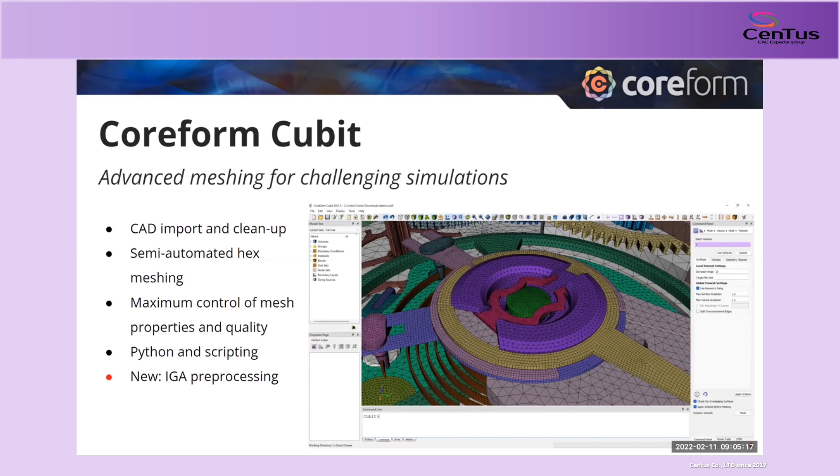I guess first, the learning objectives. If you go ahead, Greg. We're talking about 4 things today. First of all, the big picture, like what shapes can be hex meshed. We'll go through some slides to explain that. Then when Greg goes into the live demo, talk through the gotchas, some common issues that make hex meshing challenging. Greg will reference all of the powerful Cubit hex meshing features, and then walk through the item wizard, which puts them all together in a nice, straightforward workflow. ITEM, we'll define once and for all today, means immersive topology environment for meshing. Let's call it the item wizard.

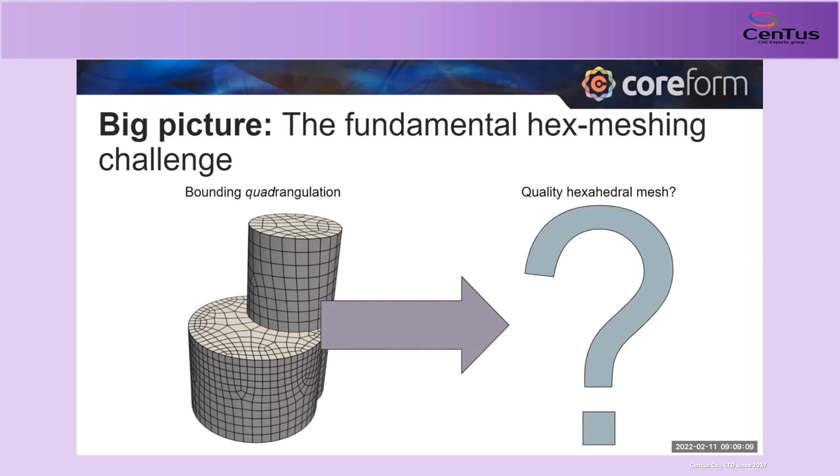So then the challenge, the corollary to that, is for hex meshing: if we have a bounding quadrangulation, as shown here on the left, there are no known algorithms. In fact, we don't even know mathematically if a quality hex mesh can even be produced on a given quadrangulation. And so because of this, hex meshing can't be fully automated like we can with tets, and it requires a human in the loop to assist with identifying how to build a hex mesh. And that's really the fundamental challenge. It's an open mathematics question.

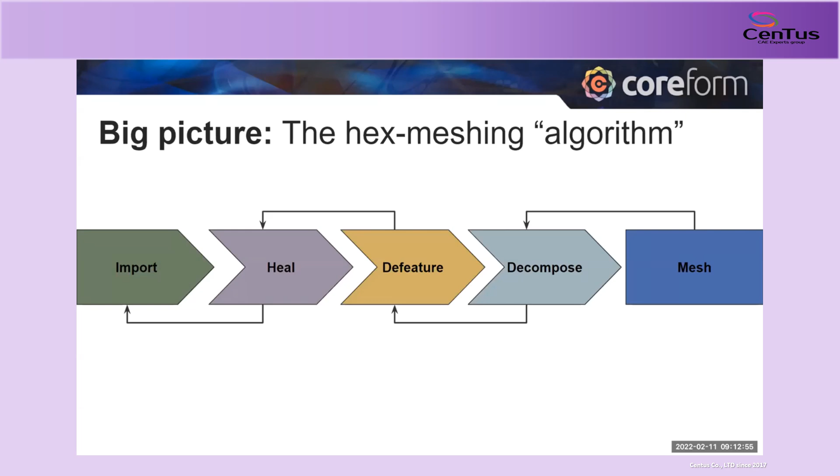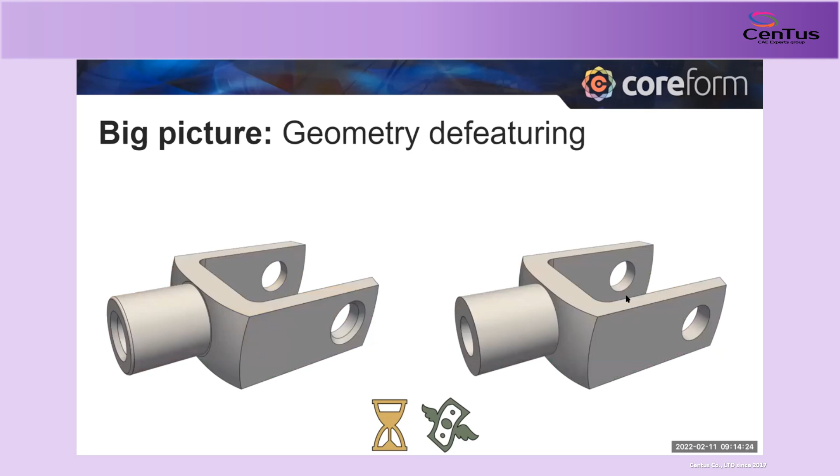Then the next big step, and this is where these simple recipes I talked about come into play, is that whole geometry as a whole here on the right, it's not really a simple shape. The computer can't yet see how to stack in these simple recipes. So what we do is we decompose this geometry into smaller, simpler shapes so that Cubit can see how each of those shapes fits a recipe. In Cubit, we call the tools that we use to make these decompositions web cutting. You'll also hear this called partitioning in some other codes.

But as you can see here, again, this is taking a human going through either manually or with some tools to help them find where those cuts are. And so again, that takes time, labor time, and takes money. And so any improvements we can make to these workflows that reduce the amount of time spent can save you or your company money.

So now what I'd like to do is switch over to a live demo portion showing the item wizard inside of Cubit.

And while I'm pulling this up, Matt, I might just ask if any questions have come into the chat yet or not. No, you're good. All right, so can people see my Cubit application? I can, yep. Okay, good.

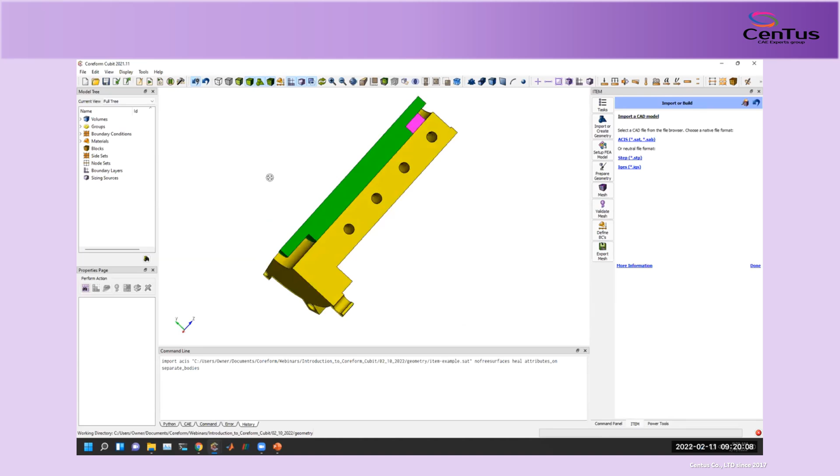So if we click on import a CAD model, while Cubit supports a lot of different CAD formats, here we're just showing a few of the formats that are most common to Cubit. For instance, we can import an ACIS file, which is the native file for the geometry engine that Cubit is based on. But we also support STEP import. So I'm going to import this item example geometry, which you can find in the tutorials for Cubit. And it's now imported this assembly of 3 components.

Once I've finished importing my geometry, I can click on the little done hyperlink at the bottom right of my item wizard. And if I keep on clicking done through these steps, it brings me back to my task description, and I'm ready to move on to the next stage.

Now, this is a spot where you can get some initial model sizing set up. We typically have budgets for how big your computer is and how many elements you can have from a performance standpoint. We support setting your default to tetrahedral meshing, which for many applications is quite valid. And you can even put in your element budget for about how many elements you want to have in your model.

So if you wanted to go down the path of tetrahedral meshing, we could put in 100,000 elements and apply that, and it would apply the scheme to prepare for tetrahedral meshing. But again, I'm going to switch back over to hexahedral as my default mesh scheme here.

So now we're going to go on to the next stage. We've done some of that initial prep work. We're going to prepare the geometry. This task has a button to run diagnostics on these 4 key things: to fix invalid topology, which is where the healing aspect of Cubit would come in, to remove small features, and to make sure that our volumes or mesh is well connected and that we have meshable topologies.

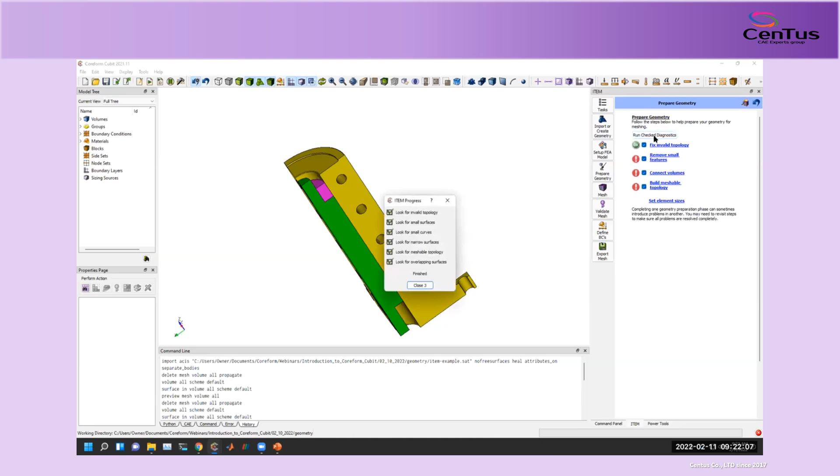So I'm going to run the diagnostics here. As we can see, it's said that these geometries are valid from a topology standpoint, so there's no need to heal this model. If we did need to heal it, we would click on this hyperlink, fix invalid topology, run the analyzer and then fix any issues. But this model doesn't have any issues, so we move on to removing small features.

We could select either all of the volumes in our model, or just a few to detect small features on. So if I click on this, here we go, find small features. The small feature size here is maybe 0.1. So I can change my small feature size to 0.1 and then detect small entities.

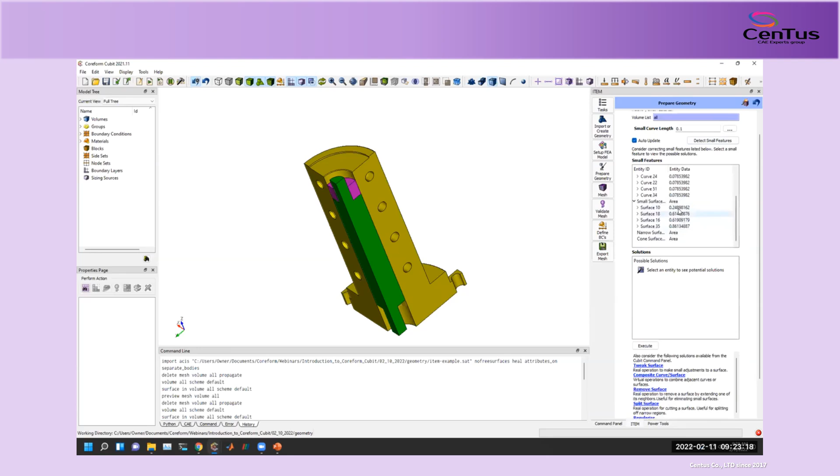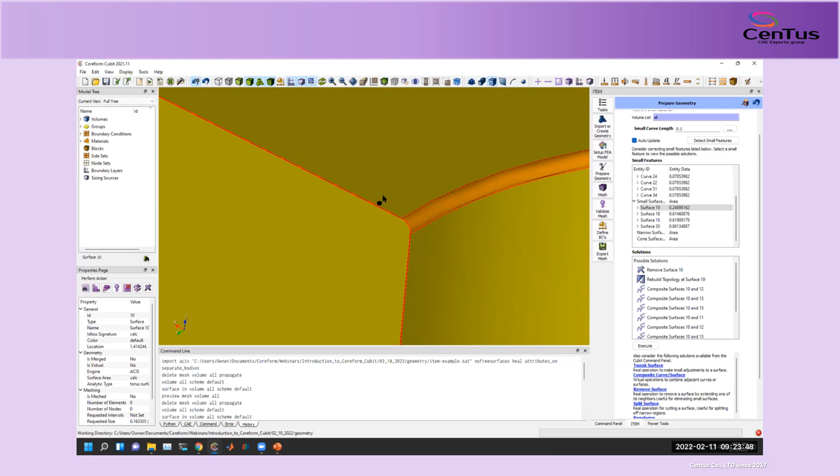And now if I expand these found things, it will highlight, in this case, a small surface, a small fillet here. If I mesh this with hexes, to capture this really small fillet I'm going to have a small element edge. That could drive down my stable time step if I'm running an explicit dynamics analysis, and that may make my model too expensive to run. So I may decide that this is a fillet I don't care about, and I'm okay removing this face.

So if we select one of those small surfaces in the small features window, the item wizard will show us possible solutions we can use. If we want to simply remove this fillet, probably the best option for us is to look at removing this surface.

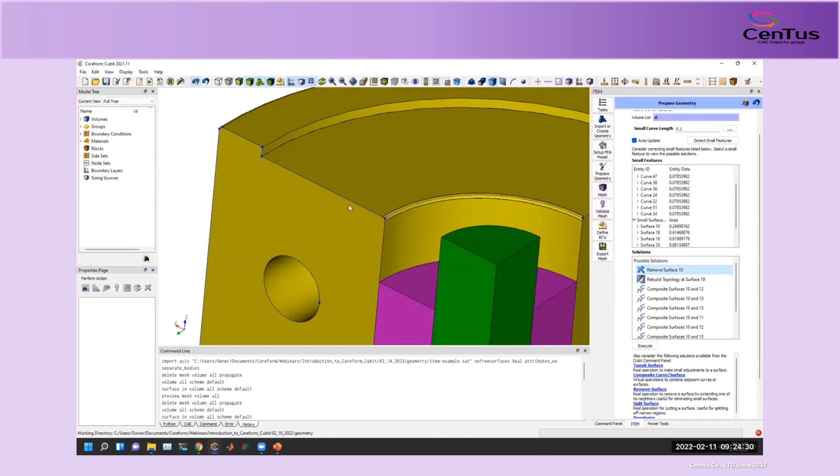If I click on remove surface, we'll see a blue outline show up, previewing what the geometry will look like if I apply that operation. So what you can see is that we've gone from this fillet to now having a right angle show up. It's like we're just extending the neighboring surfaces to remove this fillet.

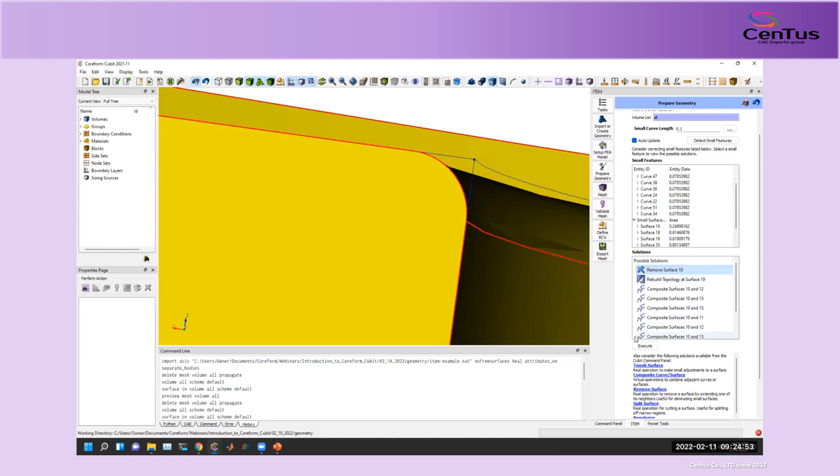That's what I want to do here, is remove this fillet. So I'm going to click on execute. We can see now it's actually gone ahead and removed that fillet. I can then come back to my small features list and find another small surface.

If I look at this, maybe I don't see this one, maybe I'll click on a different one. I'm curious about where this is located, so if I right click on it, I can get options that let me do a fly-in, and it will fly me into this small surface here.

Again, this is another small fillet that's going to drive down my stable time step for an analysis. So I want to do that same operation of removing the neighboring surface, or removing the surface. I'll go ahead and execute that.

I'm just going to make my graphics a little bit nicer here, just so it looks a little bit better for us.

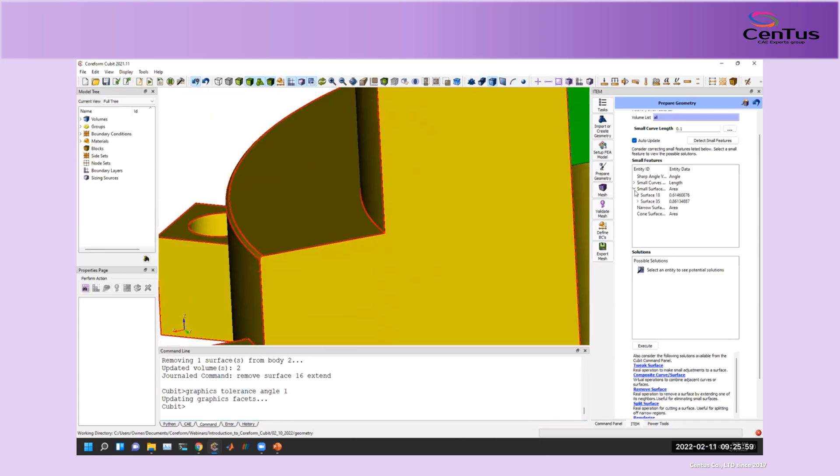We would go to another surface here, and again, another small fillet. Now, there are these small curves, which correlate again to these surfaces. But what I like to do is whenever you have a small curve, see if there are any surface operations. In this case, you can see there's an operation to remove surfaces, even though I've selected a curve.

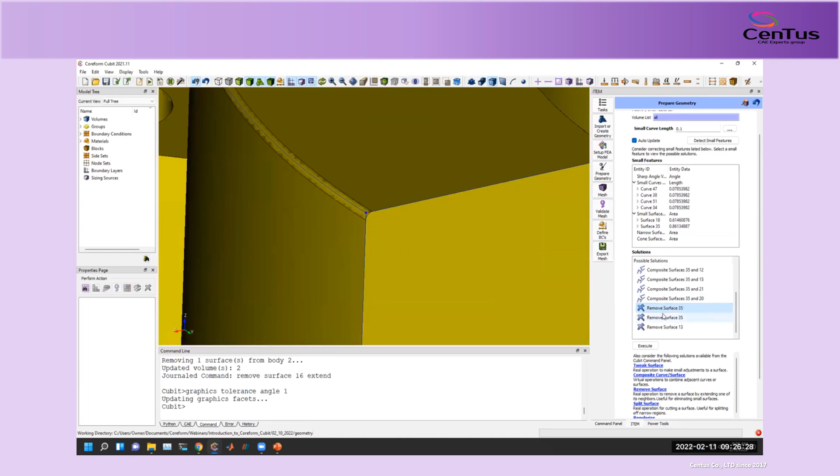So if I then choose to remove this surface, there's a couple surfaces I could maybe choose. Sometimes it might say if I select a certain option, there's going to be some error because that's maybe an invalid operation. So it's not perfect, but Cubit is trying to help identify operations we could do, and we can select ones that work.

So I'm going to select this remove surface 35, which should remove out this curve as well as a small surface. And then lastly, I've got again one small surface and some small curves, which I'm going to remove as well.

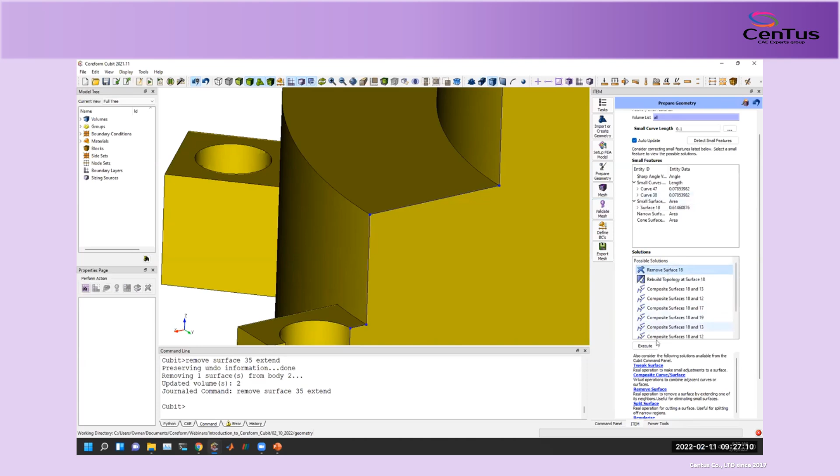So Greg, there's a question from Ishak. He mentions there could be any number of small features. It seems like manually checking and removing all of them could take a lot of time.

Yeah, it certainly could. And that's going back to our slide deck where we talk about this can be an expensive operation to do this manual cleanup. That's where there can be some challenges.

Now, what I'll say is that as a user becomes more proficient, Cubit has a command language where we can take commands like remove surface 18 extend, and start to do some logic where we select all of these small fillets using the command language, then remove all those fillets using the command language. Since that's more of an intermediate to advanced tool, I'm not going to talk about it now—we'll cover that maybe in a future webinar about using the command language and advanced options in Cubit to accelerate that. But today I'm just going to use the wizard, and the wizard is very much a one operation at a time sort of thing.

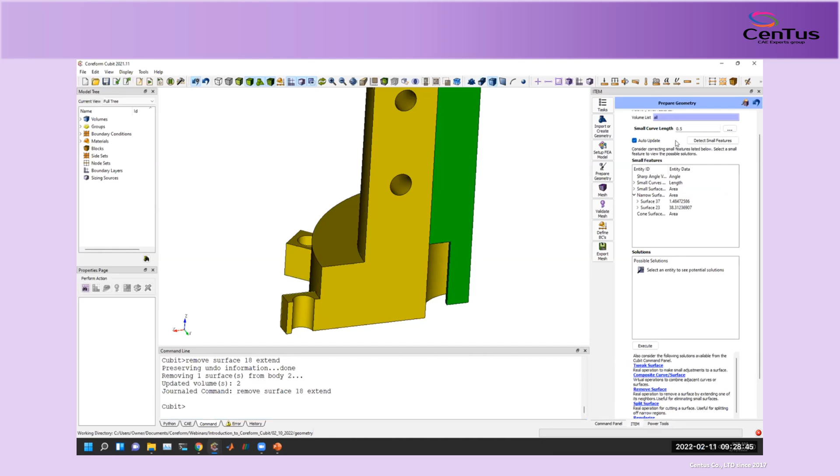I want to mention one more thing. I increased my small curve length a little bit, just so we can see maybe some false positives.

So one thing that Cubit has told me is that maybe there are some narrow surfaces. Cubit has found a narrow surface between these two curves, as well as some small surfaces if I fly into them. It's saying, hey, this is a small surface.

What I can do as a user is right click and mark this as okay, and then a little green checkbox shows up next to this surface. And what I want to show is if we go back and click done, we'd still have a red exclamation mark around remove small features, saying I am still finding small features.

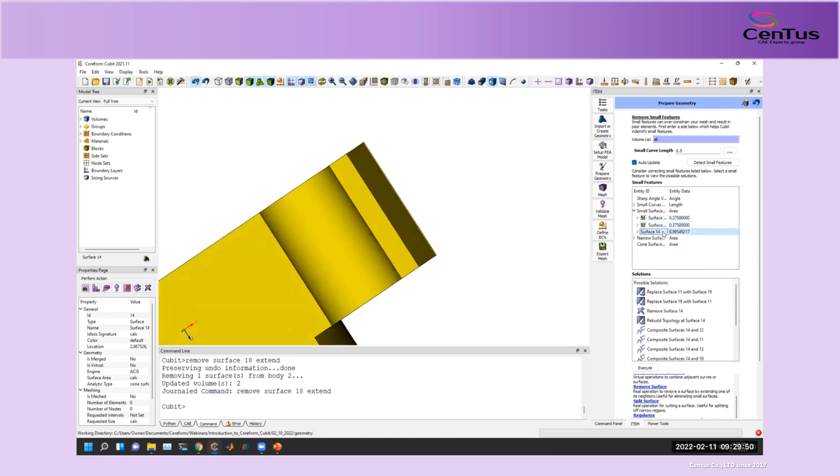So what we can do is, as we go through, decide these are features that we also want to mark as okay. There's a small surface here—let's see where this is. You know, maybe this is a mating surface with the next level assembly. Even though I know it's small and will drive a stable time step, I need to still capture this, so I'm going to mark this one as okay as well.

Again, those two narrow surfaces were showing up here and on the bottom of my geometry, so I want to mark all of these narrow surfaces as okay. I can mark all as okay. And then I've got these small curves. Because these curves were associated with either a narrow surface or a small surface that I marked as okay, they automatically get marked as okay too.

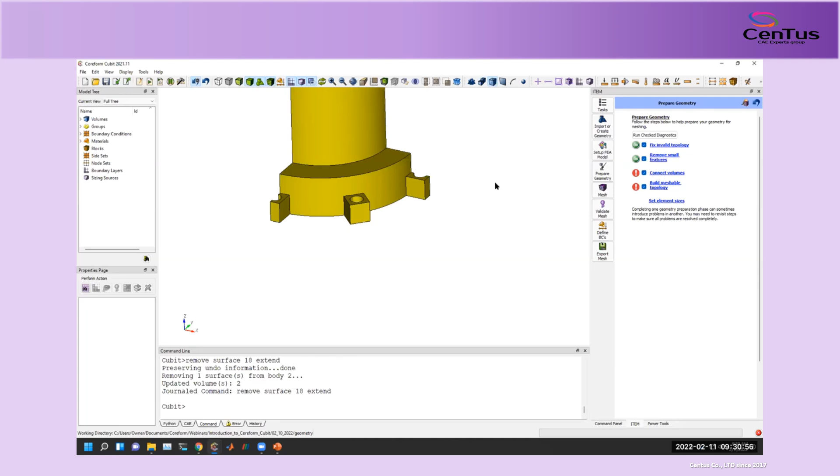So now if I click done, the remove small features box here will switch to all green—it's okay, because the small features I said, yeah, they're small, but they're relevant and small. So there's one more question: why does it matter to identify small curves?

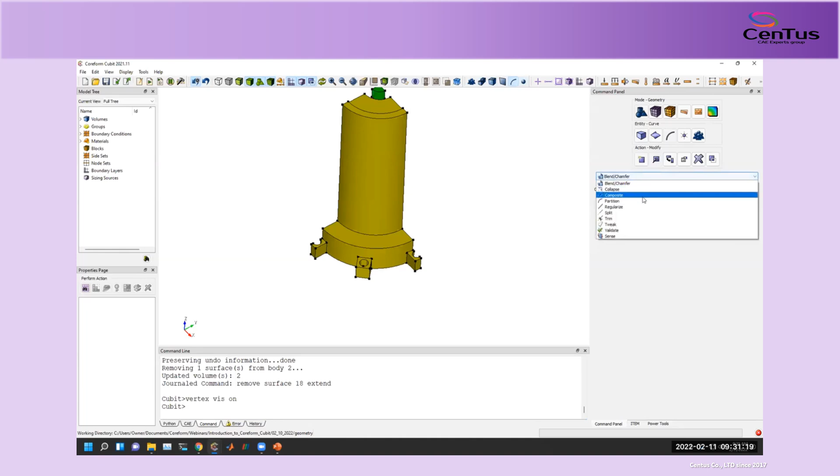What can sometimes happen—I'm going to just create a curve here so you can see this—is it will often happen in CAD applications. Let me turn vertex vis on so we can see the vertices. You'll sometimes have a curve where maybe it has been split from some operation in the CAD application, so you might end up with a small curve like this.

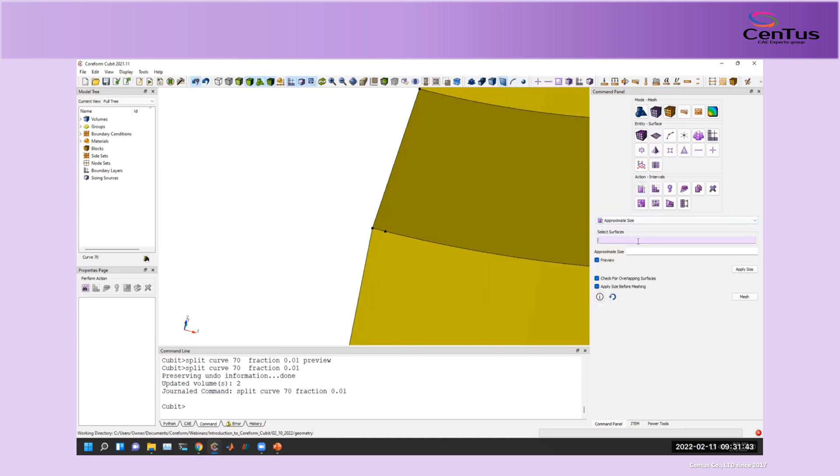If I were to, again using the command panel just to prepare this example, set a size of maybe 1 here—so if I had a really large element size that I wanted—the way Cubit and other tools that mesh CAD objects work is they first mesh vertices and curves and respect them.

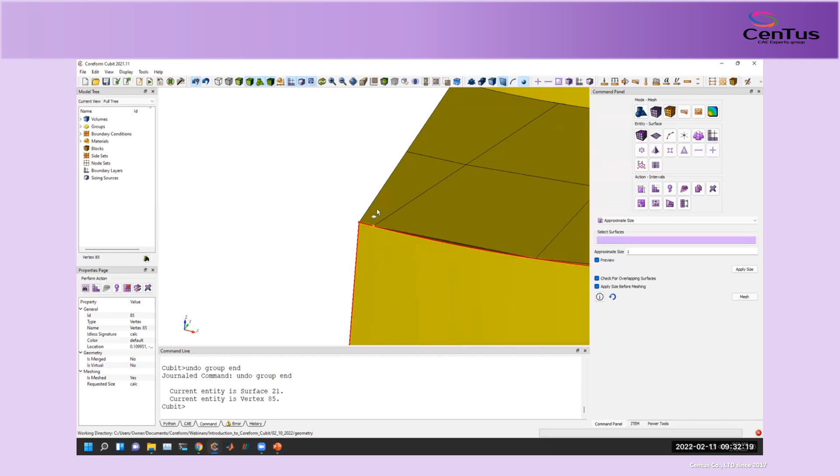So because there is a vertex here highlighted right now, it's going to drive an element to be a small element length, which can drive a small time step size, but it could also create a skewed element that's poorer quality than I wanted. So as we go through the wizard, if I now select or look for small edges, it'll find this small curve for me.

And then it gives me these options of what I can do. I could maybe look at rebuilding the topology, but that doesn't quite do what I want in this preview—that almost added more curves. I could collapse some vertices perhaps.

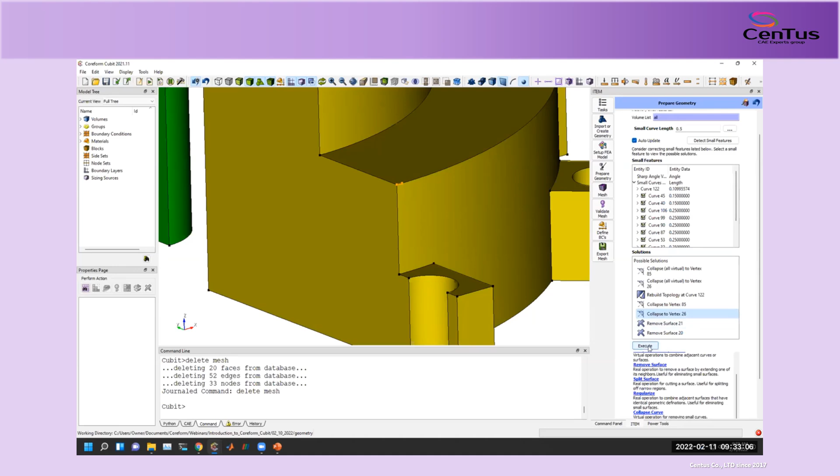So if I click on this, I need to delete this mesh first though. It'll allow me to collapse my vertex. Let's go execute this. And you can see now that small curve was essentially taken to length of 0—it kind of turned into like it was merged in with this other vertex.

But that's why you want to remove small curves—you want to remove curves that are smaller than you need for your analysis. Small curves are also often indicative of there being a fillet, and fillets are notoriously difficult to build a hex mesh on. They can be done, but if you have 100 fillets in your model and only one matters, you want to remove the other 99 that aren't important and only worry about the one fillet. That's why we're removing these.

Yeah, that's a great question though—is it the radius or the length of the curve that matters? For a fillet, the length would be proportional to the radius, but obviously a fillet is typically like a quarter of a circle. We typically go by the curve length, but you are right, it tends to be just the fact that you even have a fillet at all that's the issue with those. Generally, you're going to find fillets usually show up also as a small surface.

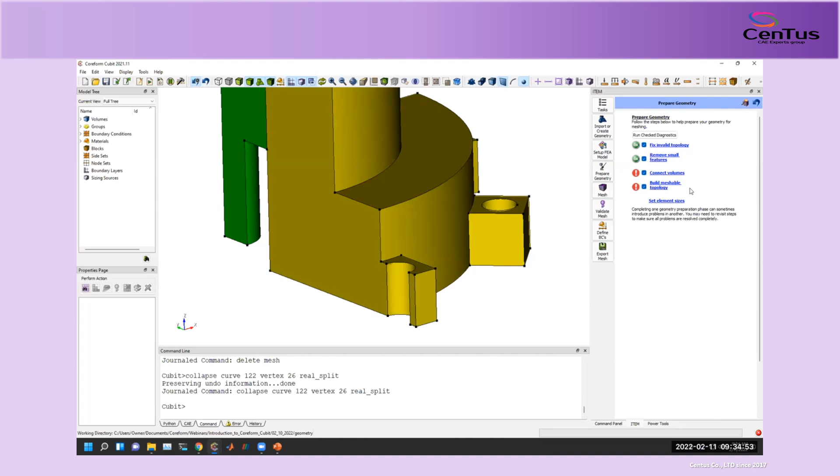So the next thing I want to show is this connect volumes tool. Here we're going to run a simulation where this is maybe like a steel header with a pin on the inside of it, and I want these joined. So we want these connected.

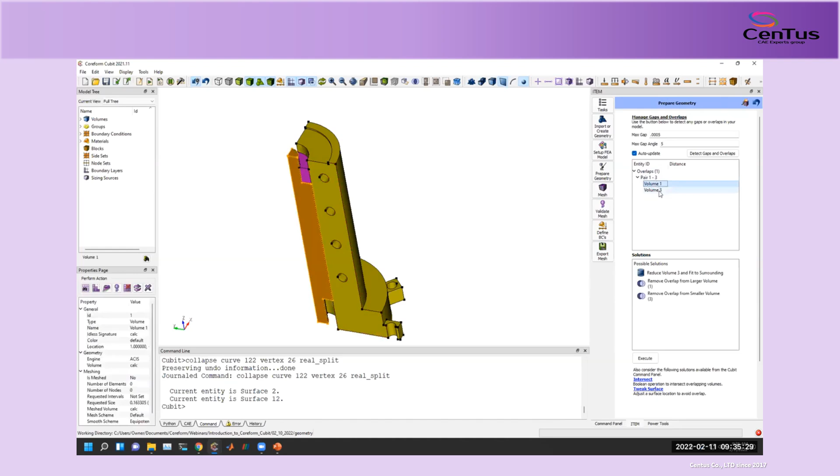But one thing we want to do first is see if there's any gaps or overlaps in our model. I can click on detect, and it showed me there's an overlap, giving me a pair and which volumes are included. If I click on the volumes, it'll show me those highlighted. If I right click on the pair, I can ask it to draw the volume overlaps, giving me this new rendering.

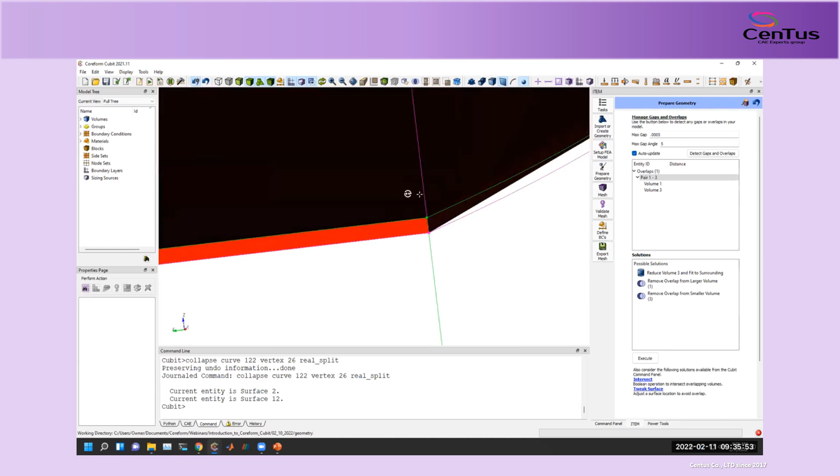Here in red, it's drawn this overlapped region. If I zoom way in, I can see this overlapped region here, but maybe I'm a bit confused as to what's going on. If I click on volume 1, I can see it comes up on this stair step feature, coming up to this red curve here at the top. If I click on volume 3, I can see it came down to here. So if I toggle quickly between them, you can now see what that overlap is.

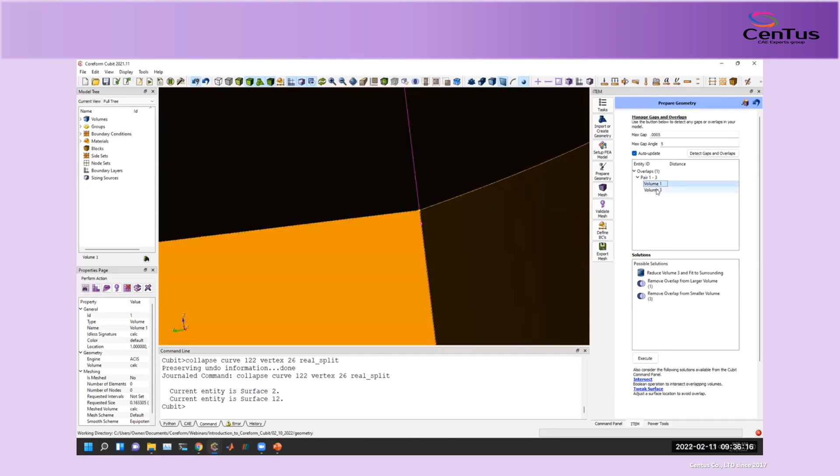I can reset my graphics, and now zoomed in at this region, lo and behold, there is my overlap. So now I've got some options to fix this - I can reduce a volume, but this doesn't really seem to get rid of the overlap. I can also click remove the overlap from the larger volume, which would be the green. If I execute that, we can see the overlap has disappeared. And if I do detect gaps and overlaps again, there are none anymore.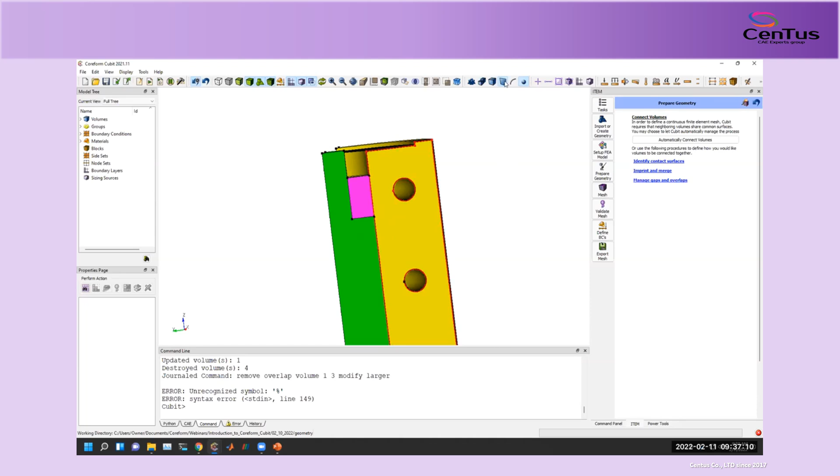So now I'm going to go to imprint and merge. What this is going to do - if I look at the yellow volume and the green volume, I want a conforming mesh, a mesh that's joined at this interface. But if I draw this, there's no topology information on this yellow surface that there's a green body nearby it, so it has no knowledge of there potentially being a neighbor. So what we need to do is imprint and merge some volumes.

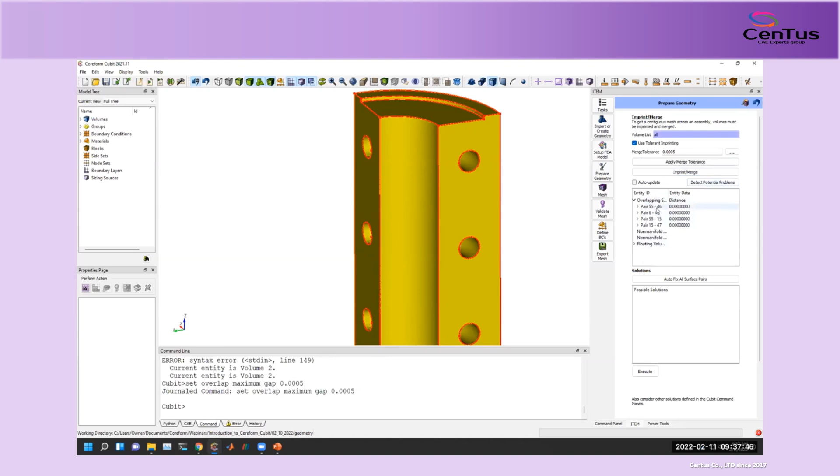Again, it's found some volumes. I can change my merge tolerance if I wanted to. I can then click on a given pair. Let me refresh my display here. Again, I can draw the surface pair with the volumes to see what these volumes are. So this was this pair here between the purple and the yellow.

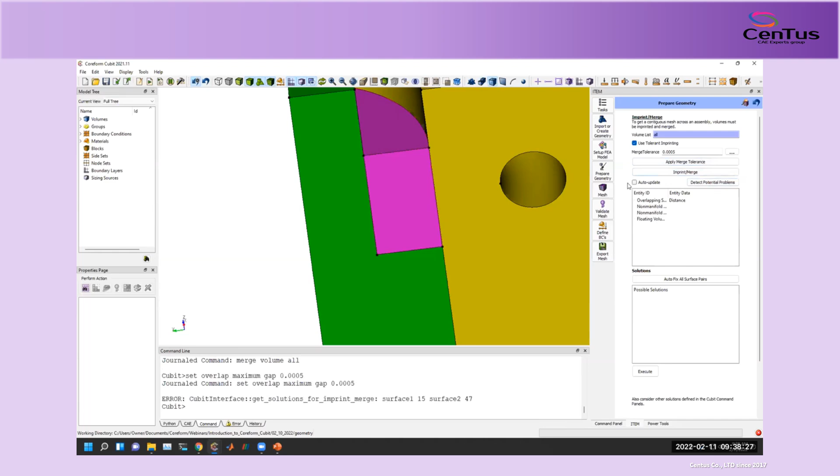I've got, if I needed some smart fixing, I might do that. But otherwise, I can just click on imprint and merge for all of these things. But watch what happens now - if I do imprint and merge for these volumes, if I now look at this yellow volume here, I've got some additional curves that are sharing the topology of that green volume. That's important for making sure my meshes align.

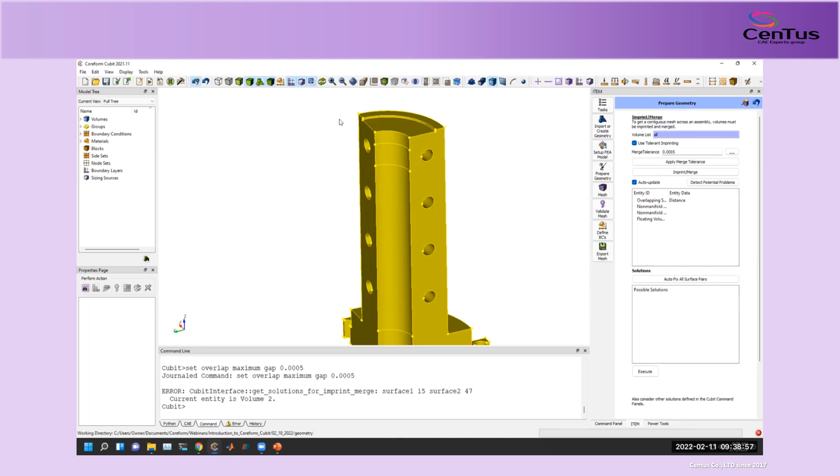So if you've forgotten imprint and merge, you'll have meshes that are disconnected from each other, and you can't transmit stresses between them without using something like a tied constraint or tied contact. So now I'm done with this step. If I had contact, I could identify these contact surfaces instead of doing imprint and merge, but we have no contact in this model - they're all imprints and merges. So I'm going to click done.

And now I'm moving on to building a meshable topology. This is a nifty little tool - I really encourage this for new users to Cubit, or even if you're trying to learn about some advanced mesh schemes. I've actually learned some neat little tricks using this tool. If we click on check meshability, we'll get two lists of volumes that are either meshable or not meshable. This is based on previously when we set up our FEA model and said we wanted to build a hex mesh.

Again, if we'd wanted a tetrahedral mesh, this geometry is already meshable for tets. But I can click on volume 1, and I now have some options here for what I can do. I can maybe decompose this volume, that decomposition step we talked about. And so now, again, the same list here, I've now got possible solutions that I can click on one solution, and then I can use my arrow keys to move up and down through the different solutions.

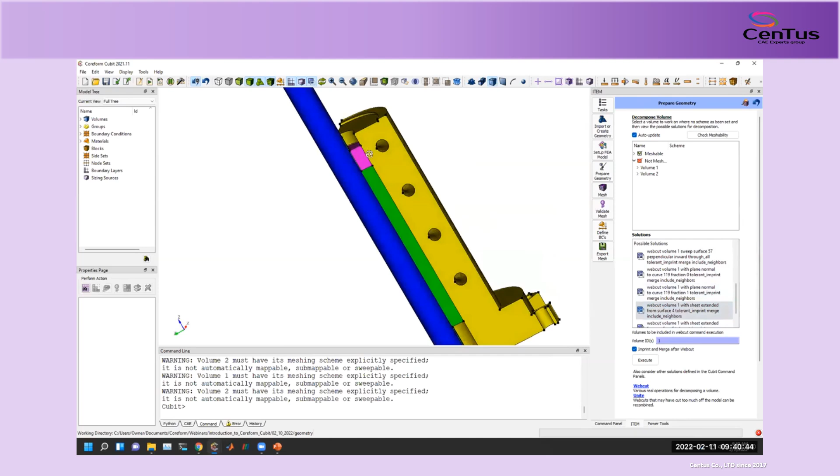And what we're seeing is for each of these, again, a blue surface, and we call this surface the web that's cutting, right? So this is why we call this web cuts, because this blue surface was coined a web a long time ago by the Cubit team. So maybe I want to apply this cut because I can see that it's going to cut along this inner radius. And that will give me kind of a hollow cylinder here and then a kind of a sweepable surface. So I'm going to go ahead and execute.

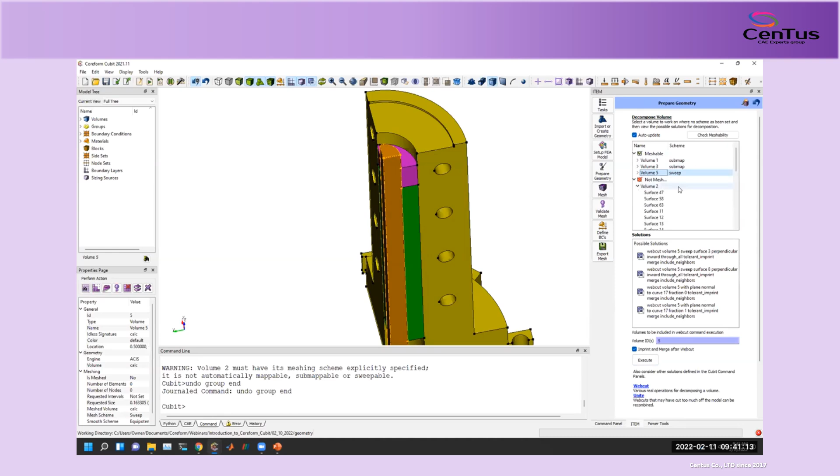And what we'll notice is now in our meshable volumes, I've got now volume 1, I've got this volume 3, I've got this other now volume 5. And those are all now meshable. Volume 2 is still not meshable. So we're going to look through here to see how we can mesh this. So I'm going to click on the first solution here and see what I can do.

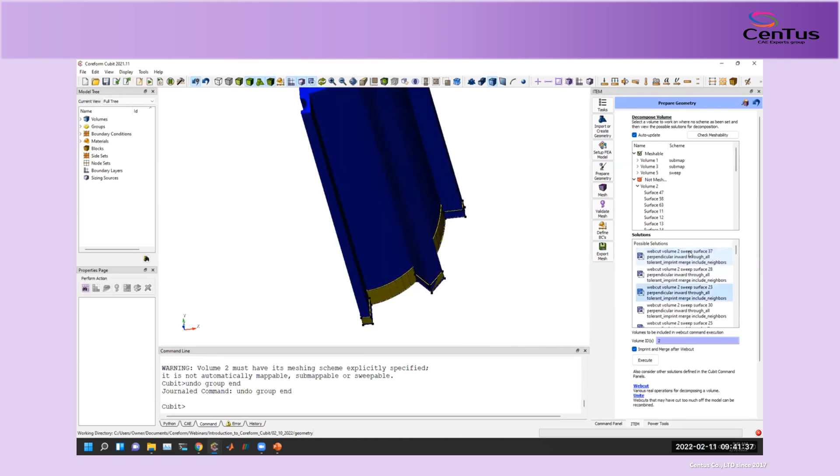Now, what I like to do is, I don't always have to take the first option because there's oftentimes more efficient ways to do this. Because maybe I can cut all 3 of these little appendages off at once. And so if I just cycle through these, here's a cut that's going to sweep this surface down through. And so that will separate not just these 3 appendages from the yellow volume, but also separate this kind of cylindrical region from this yellow volume. So that's the web cut I want to do. So I'm going to go ahead and execute that.

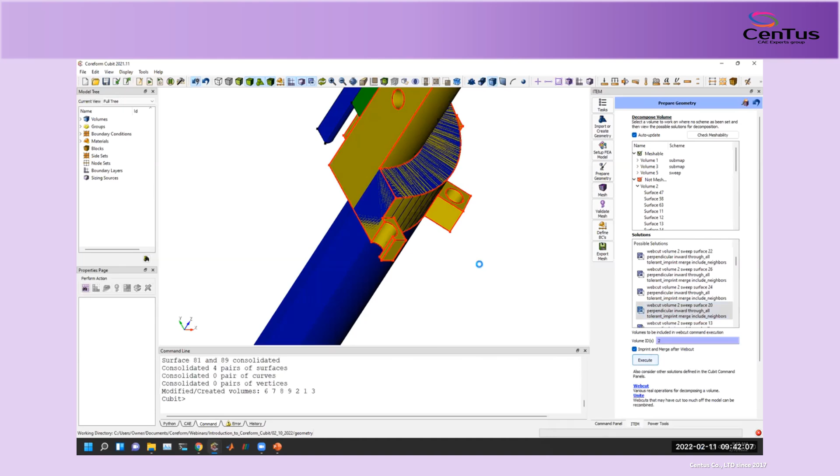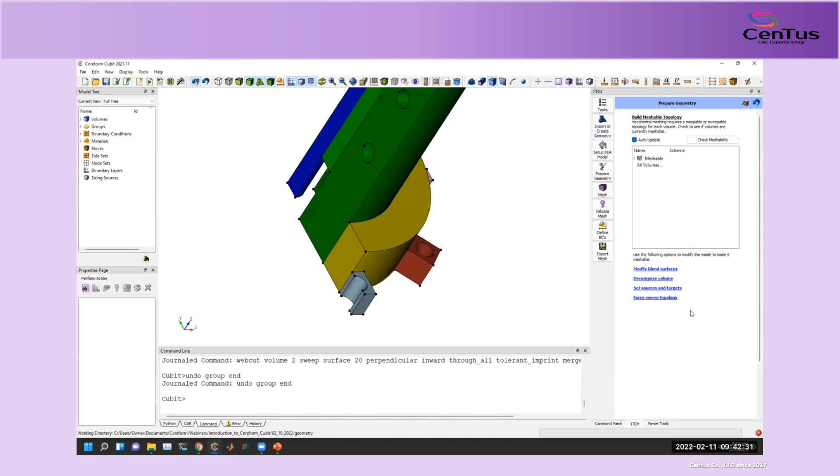And now what we see is that all of my meshes are now meshable. And if I don't believe it, I can always just re-click on check meshability and double check. And yep, everything is meshable. Sometimes the web cut might cut off a little bit too much, and you might have to come back through and clean some stuff up by reuniting some geometries. But now I'm done with this step. I can rerun my check diagnostics.

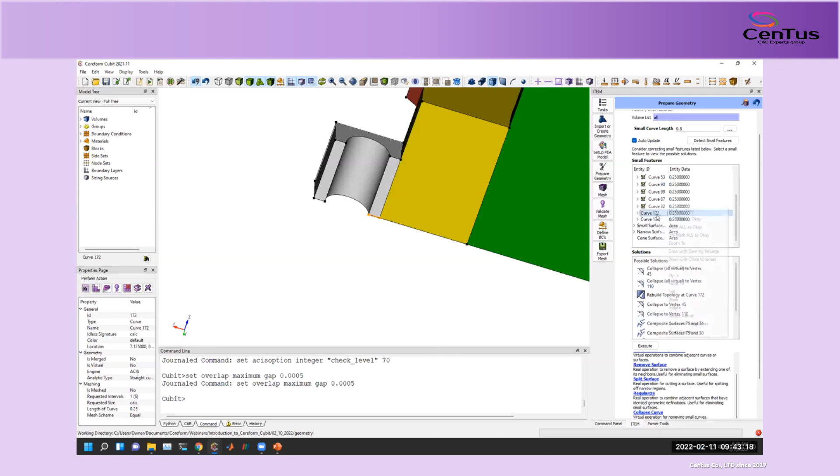And now Cubit has said, hey, I found some small features. So we talked about going back and forth. So I'm just going to double check what these small features might be. And again, this is based on the small curve length that I just picked of 0.5. And so if I look at what these small curves are, I can fly in. And well, you know what? That's a small curve that I said I wanted in my model because I wanted to chop off this gray surface. And so that's a curve that I'm going to just live with. If I want to capture this feature, I have to have it. And so again, I might mark as okay.

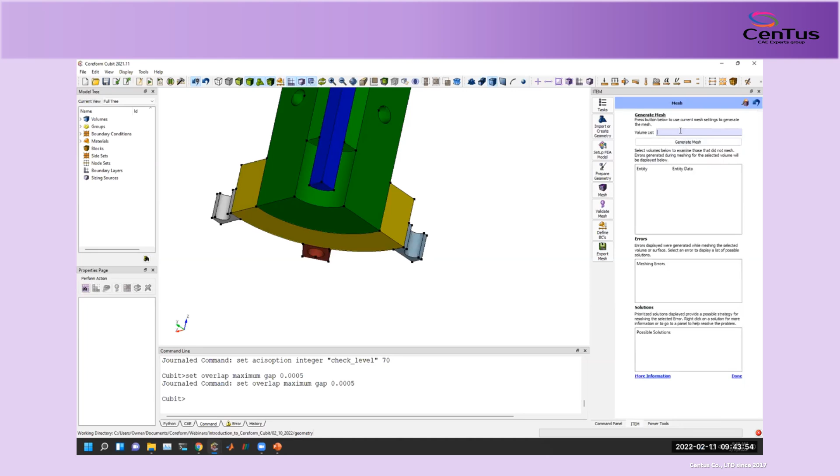And I'm going to presume that this is on the other side. Yep. And I'm going to mark this as okay. And I've got a few, again, small surfaces. And again, they're on those little appendages. So these are also all okay. And now we see that, right, now I'm all green. So if I'm all green, I'm ready to mesh. So I click done, and now I'm ready to mesh the geometry. And I can just select all my volumes, and I can generate the mesh.

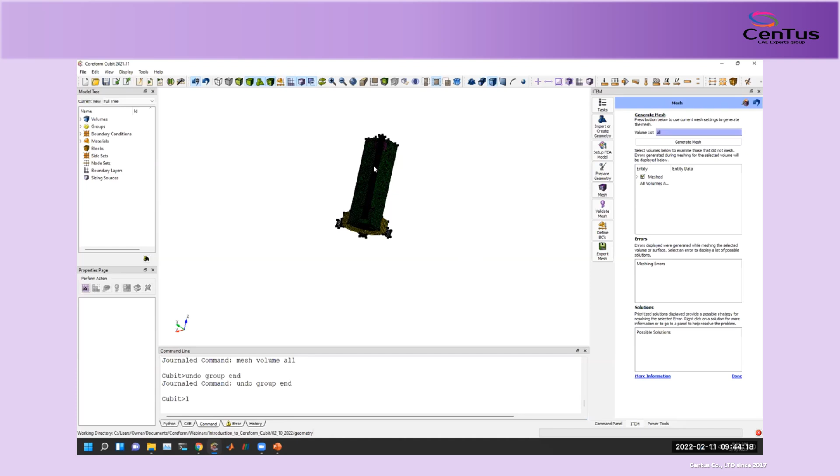And I can double check how many elements I have. There's a command line option to, actually, I think I can select these in the monitor here. Let me just see if it'll let me. So I can right click and I can show quality, but I just wanted to see, let's see, list mesh info. And so I can see per volume, I can get some information about what mesh schemes might have been used. I think maybe it won't tell me how many elements I have.

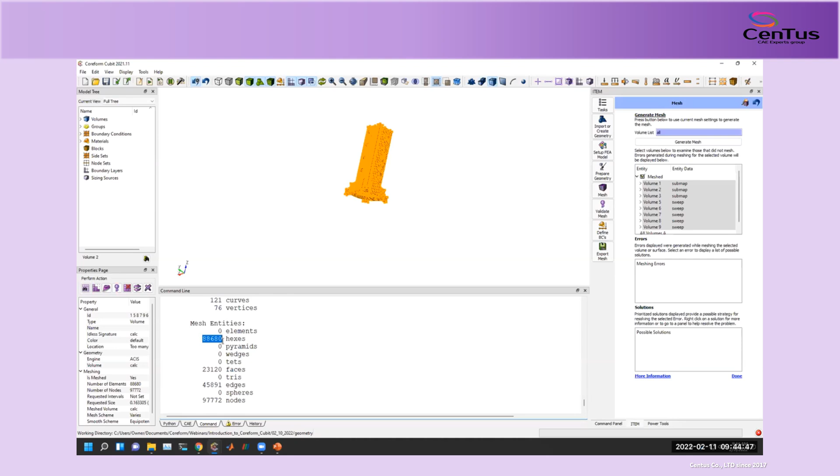I guess if I do list totals, it will then list out for me how many elements I used. And so we can see here, I asked for 100,000 elements and I've hit right around 90,000 elements. So pretty good matching to my element budget that I asked for.

So now we've built this mesh. If I wanted to change some of my mesh schemes, I can always select a volume. If it hadn't meshed, I could choose a possible solution. I could go back a stage and come back. Oops. Again, I've got a development build of Cubit, so my documentation is broken, but there are links that will help give you more information about what you can do. So I'm going to click on Done.

Next, we might want to validate our mesh. I can define the metrics I care about. Maybe I care about the size of my elements, which is important for an explicit dynamics analysis. And I can check my quality on these volumes. It's going to show me my best elements, but also my worst elements here in red that I might want to look at from a quality standpoint.

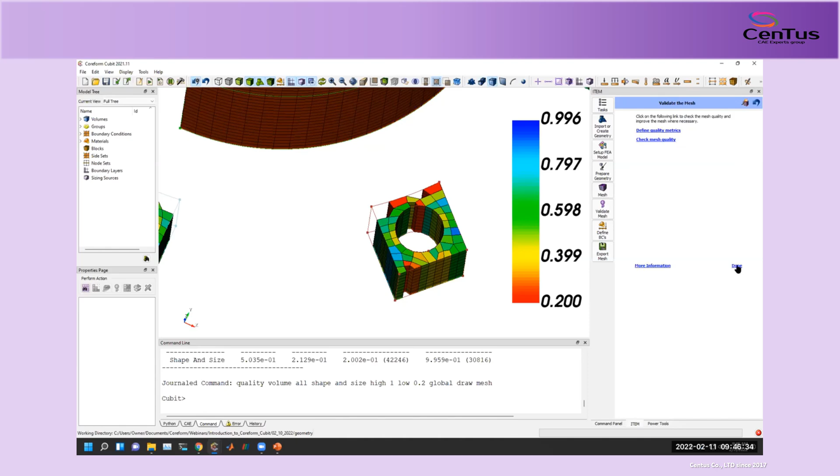I can go back to my quality metrics. If I'm doing a statics analysis, like a nonlinear statics analysis, I maybe care more about how good the Jacobian is, because the scaled Jacobian is going to tell me how easily my Newton solver can converge to solutions. So I'm going to check this mesh quality with the scaled Jacobian metric.

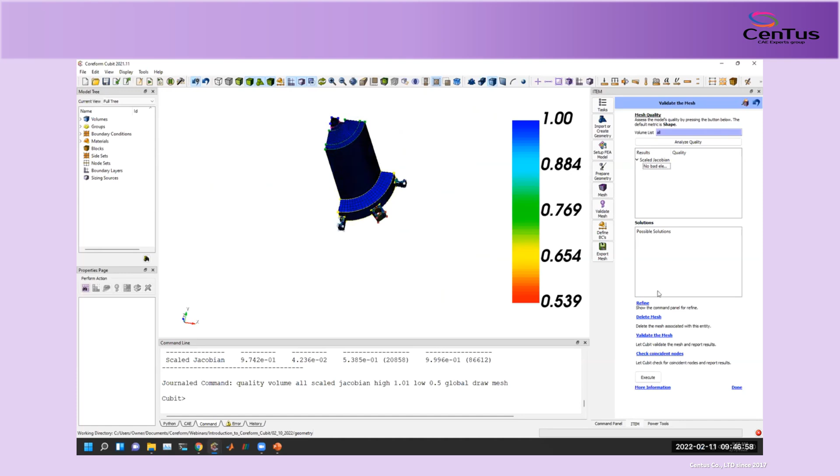Again, the red elements are my lowest quality. This looks to be my lowest element. But it's telling me that based on my criteria, none of my elements were bad, because I have my minimum set to 0.5. If you wanted to refine your mesh in a certain location, there are options to refine a mesh. This will take you over to our command panel. You could also delete the mesh.

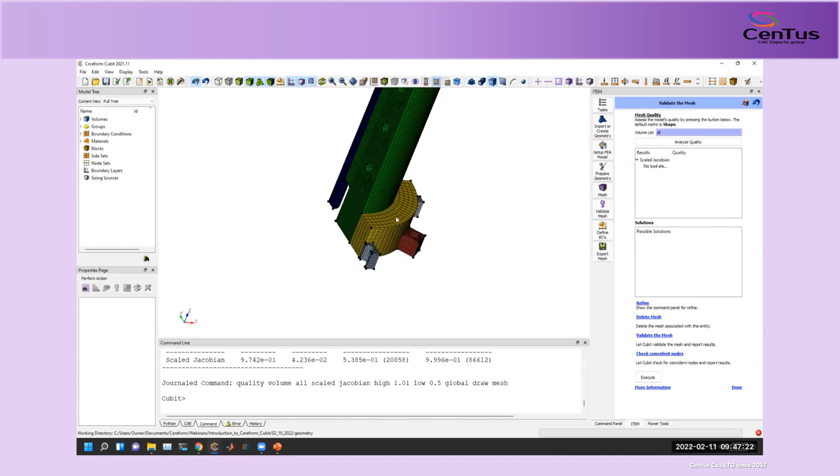So Greg, there was a question that came in: if they wanted to just refine, say, the yellow volume, how would you do that? Yeah, this yellow volume here. If we click on refine, this takes us to the general refinement tool in our command panel. At this point, I could click on this yellow volume and tell it how many iterations to split it with.

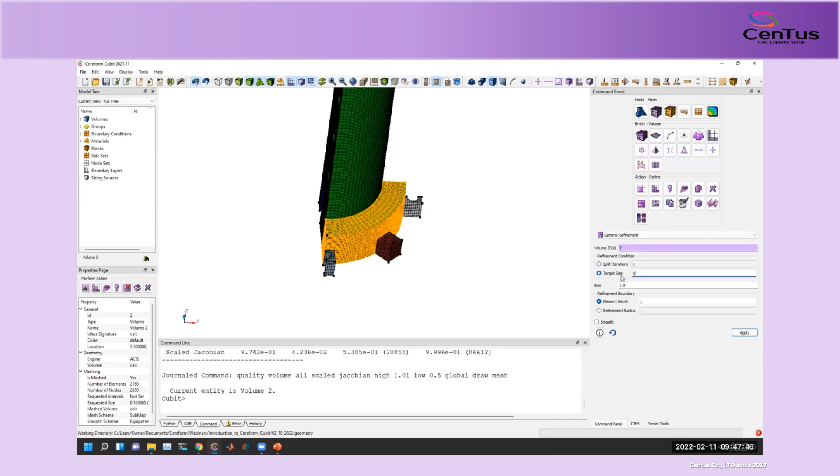There are some options I can choose, like maybe a target size instead. I can select the little edge tool here and select an element edge. My length right now is about 0.45. So maybe I could choose a target size of 0.2. I could also do some post smoothing by checking this box, but I'm not going to worry about smoothing.

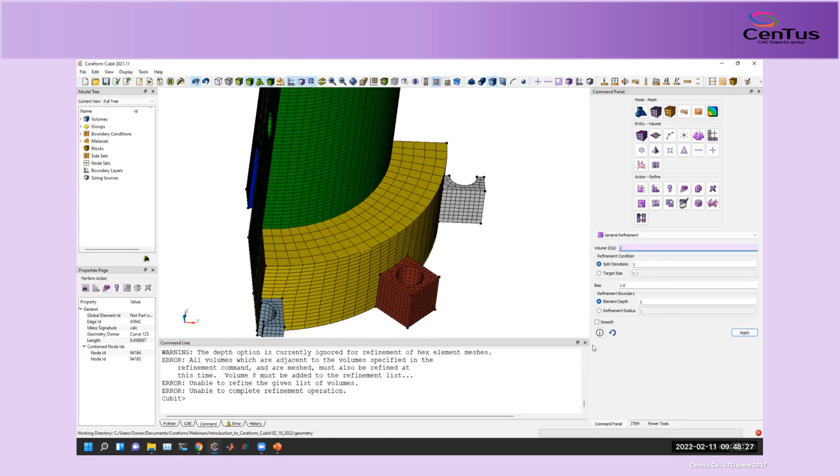So if I click on this, I guess we can't refine volume meshes based on size. So maybe I'll just split. If I put this in by 1, that'll give me from 0.45 to about 0.2. Let's see. Depth option is... okay, I need to add volume 8 to my list. It looks like I have to select multiple volumes in order to do this, so I'll probably have to operate on my entire model.

Is this because you merged them? Yeah, it's because it's merged. Refining the yellow volume is going to require a refinement of the green volume and all of its neighbors. There are things you can do, like adding a sheet between a few nodes if I wanted to refine at a specific location. So there are multiple options. That's probably why for volumes it's just doing all of those volumes with one iteration of subdivision.

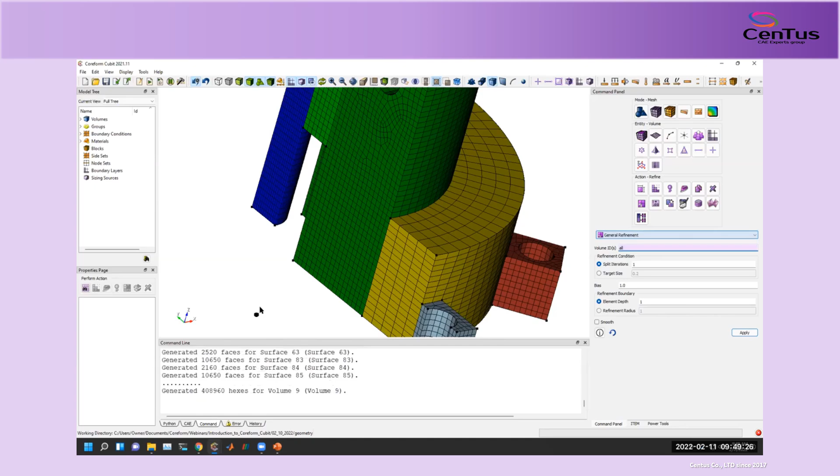Okay, but if you had a solver that could take non-conforming meshes, they just wouldn't merge. Is that right? Right. If I was using a tool like Abaqus that allows for a tie constraint between the yellow and the green, and I didn't need a conforming mesh here, then I could have just refined the yellow.

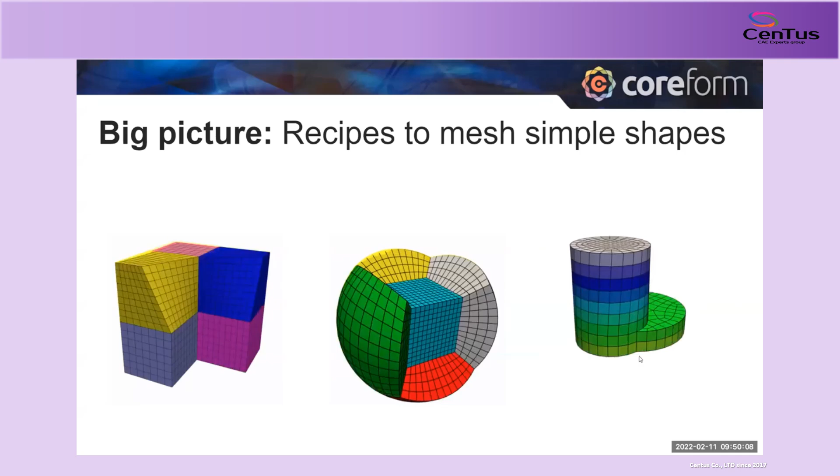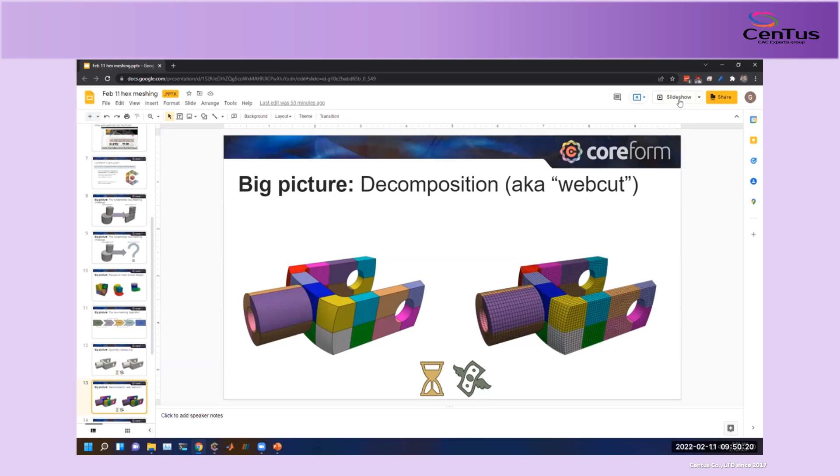But this is one of the gotchas with hex meshing. As we saw in the PowerPoint earlier, these mesh schemes all natively have structure behind them. Even this swept mesh is structured in the sweep direction. So you tend to get refinements that propagate throughout the geometry. That's one of the benefits of tetrahedral elements: being natively unstructured sets them up for local refinement more easily than hex meshes.

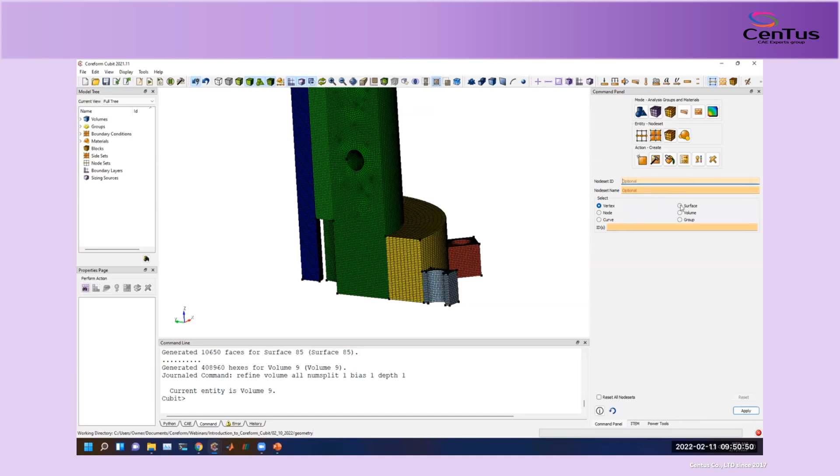Yeah, so I just want to finish up here. So I've validated my mesh. We have some options to set boundary conditions. And Cubit, while it does have an option for materials and other boundary conditions, what Cubit really is meant for is preparing certain surfaces or geometric entities for a code like Abaqus that uses sets as its definition.

So I might make a node set, maybe I want like a reference point. So like node set 1, I might call this reference point. And I might select a vertex on my CAD geometry. So I might select this CAD geometry here, and then that will automatically pull any nodes that are associated with that when I export.

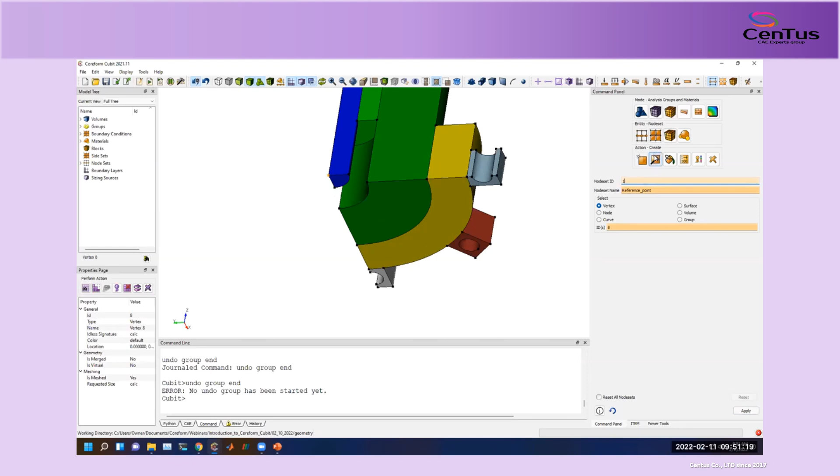I can select side sets, which might be what I do a pressure on. Or the code might let me do like a zero displacement boundary condition. So I might create something here. Maybe I'll call this X min. And I'll select these X min surfaces by using control and clicking to select multiple surfaces. So for this coordinate symmetry model, I want to apply a symmetry boundary condition here. And in my model tree, I can now see that these items have been getting created.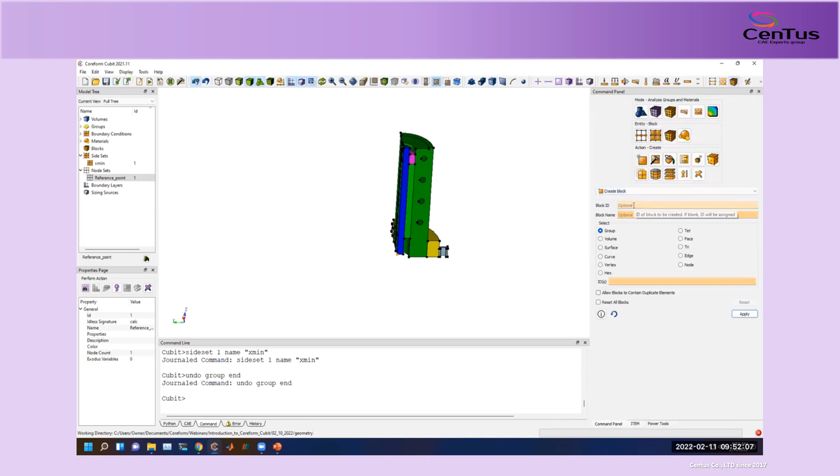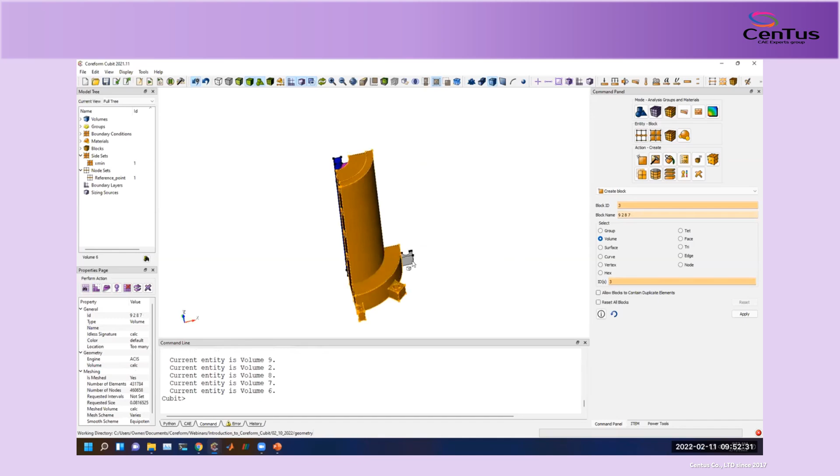For time, I'm going to skip doing the Y max, but I can now define blocks, which might be from my material. So maybe I've got block 1 and it's going to be called pin. And it's going to be these 2 volumes here that originally had been green. Another volume, I'm going to call gasket. And it's this purple volume. And then a third block that's going to be these remaining volumes. And again, I see those in my model tree.

Oops. Looks like I fat fingered something. Here we go. Apply. Oh, and I gave it the wrong name. That's what I did. I got the name wrong. So let's just rename this to header.

And so now in the item wizard, I'm done assigning my boundary conditions and I'm now ready to export my mesh to any of these formats that Cubit supports. So the native Genesis file format, which is another name for Exodus, the Sandia mesh format that's open source, and codes like the open source MOOSE code use Genesis and Exodus. We can export to Abaqus or I-DEAS, Nastran, Patran, or LS-DYNA. And so I could choose to export one of these files and save it somewhere.

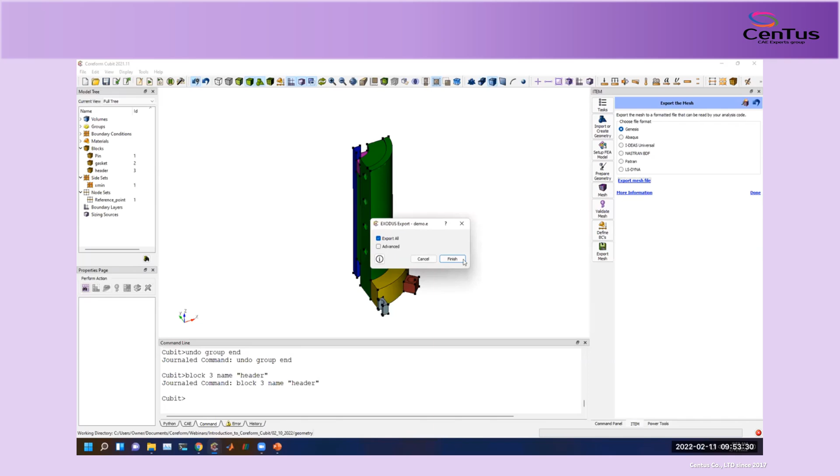And that's really using the item wizard. So let's go back to my slideshow now, unless there's any questions. Yeah, there are a few. Go ahead and just finish up your slide because we've got just 5 minutes and we can answer questions.

So I encourage you, as you move forward with trying to master hex meshing, there's a few steps that you can do. You can download the free trial of Cubit. We also mentioned Cubit Learn as well, but you can sign up for your free trial here, which doesn't have any limitation on mesh export, but is a 30-day trial. Again, there's also Cubit Learn, which is limited on export, but it's not a 30-day limitation.

We also have our tutorials on our webpage that you can walk through. And I really encourage going through the Cubit 100 and 200 lectures here. These are really good lectures that Sandia put together. And you can also join our user forum and ask questions and get really responsive answers from the Cubit team and a lot of people with a lot of experience hex meshing. Yeah, and so now I'll go ahead and open up to questions.

Okay. Well, great. First, thanks again. You do an excellent job on these, and thanks for the time you took to master this and then to share it today. Yeah. Okay, here's a question from Ibrahim.

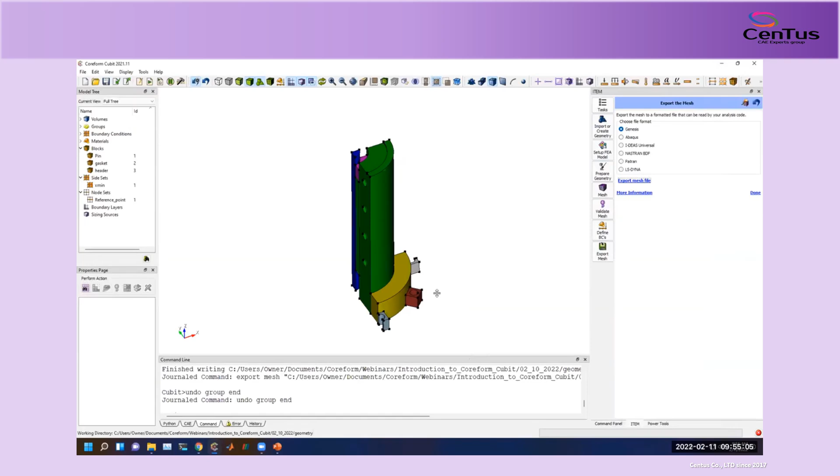How can you use hex 20, and how much would using hex 20 reduce the number of total elements? Yeah, that's a great question. So the way that Cubit works is that, again, Cubit was based on codes being developed at the US Department of Energy National Laboratories. And they use this kind of logic called blocks, where in their codes, a block is what they assign a material formulation and an element formulation to. And so once you create a block in the properties page, the block will have an element type based on, if you've meshed maybe a surface with quads, it will default to like a shell.

If you meshed it with tets, it'll default to like a tet 4. We always default to linear elements just for speed. But if you click in this element type here, you'll then be presented with all these different element types that you can choose. And you'll notice here that these element types correspond to the Exodus mesh format, which you can find on GitHub. You can find documentation. I believe that their elements are compatible to Patran. So I believe that Exodus uses the exact same orientations and formations as Patran does.

And so here we can find a hex 20. And so I could, if I redraw my mesh now, let me actually delete mesh. Let me do a coarser mesh here, just so we can see this more clearly. Oops, that's too fine. I want it a bit bigger. Delete mesh. Vol all size 5. Mesh vol all. Oh. Might need to reset those volumes in. I think the item wizard is... all size 1, mesh vol all.

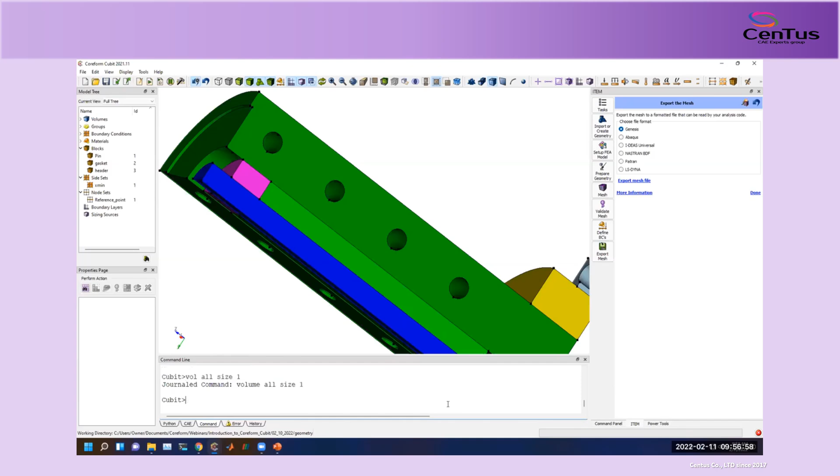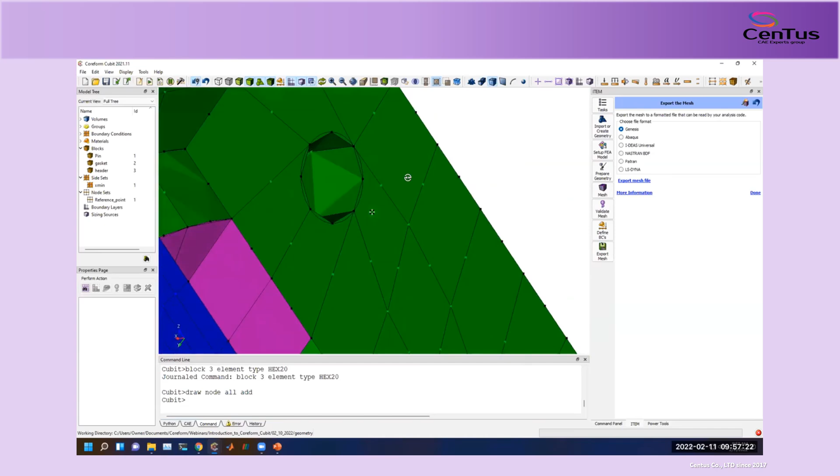Here we go. So this is a really coarse mesh here, but what we'll see is with this block, if I change this to hex 20, you'll notice that the faceting gets a little bit finer. I can also draw node all, and you can now see these additional mid nodes showing up on my elements. Now, as far as how much that reduces the total number of elements, that's really simulation specific. And all that Cubit does is it just builds the mesh.

But what I recommend that all analysts do, I mean, higher order elements do converge at faster rates than linear elements. So if you can afford to do that, that can oftentimes be a good option. In some analyses, especially like explicit dynamics analyses, there may not be a benefit to doing higher order elements because it cuts your time step down, and you get some robustness issues with regards to inverting elements that kind of have made linear hexes just the go-to for explicit dynamics analyses.

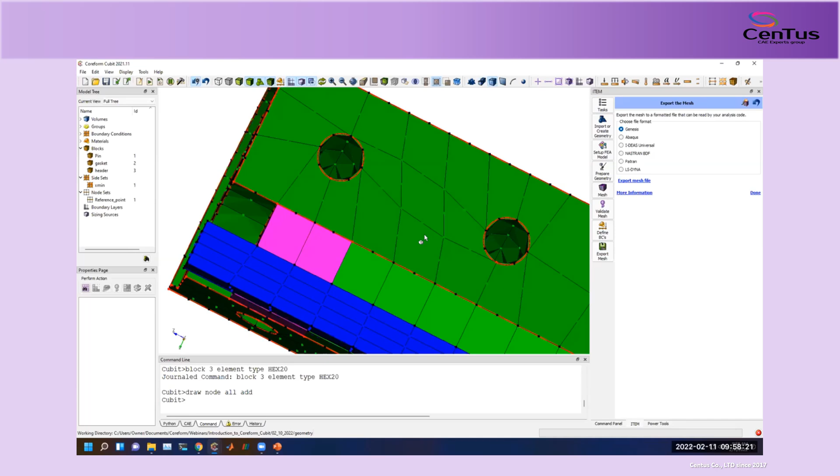But you can find that these higher order hexes can be pretty good for reducing your element count. And they are more efficient per degree of freedom, which is really what matters, more so than the number of elements. But yeah, that's a great question. We're looking to make sure that we can add more support for more element types as well. So I think in future releases of Cubit, it may not be immediate releases, but I think we'll see more options for what are available here. But that's where today you would change those element formulations.

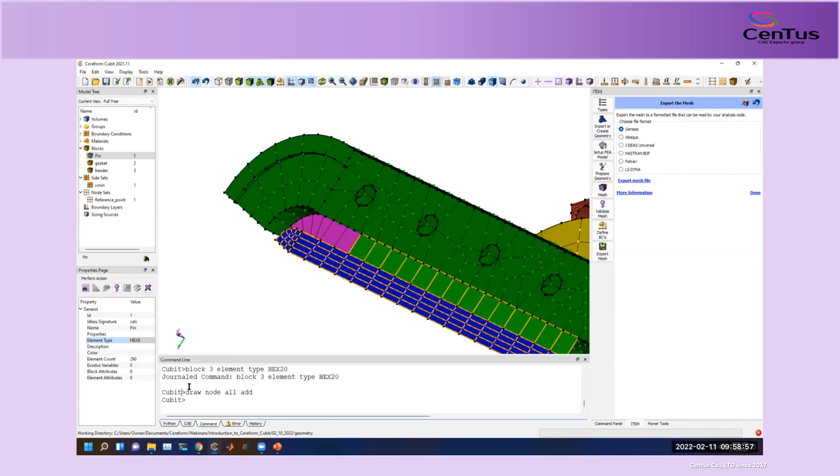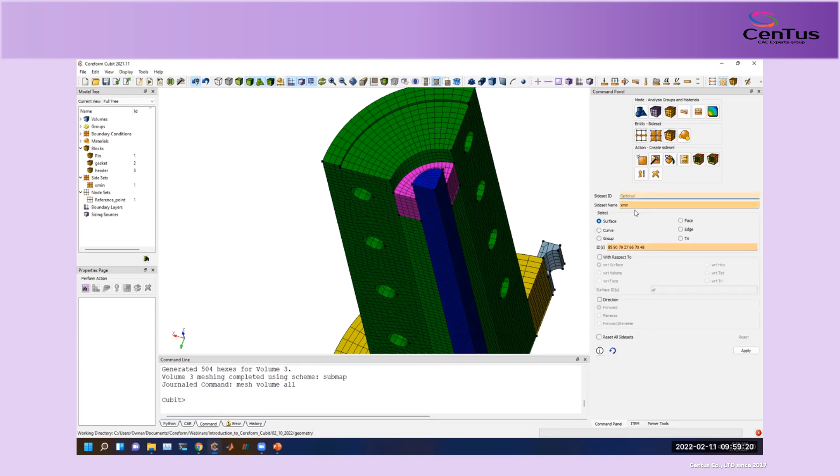Okay, Greg, I think we've got time for one last simple question. Okay. What's the difference between a side set and a node set? Yeah, that's also a great question. So maybe to make it even clearer, let's now delete mesh, vol all size 0.25, just so we can see this. If I create a node set on this other face, let's create a node set here and call this yMax on these surfaces.

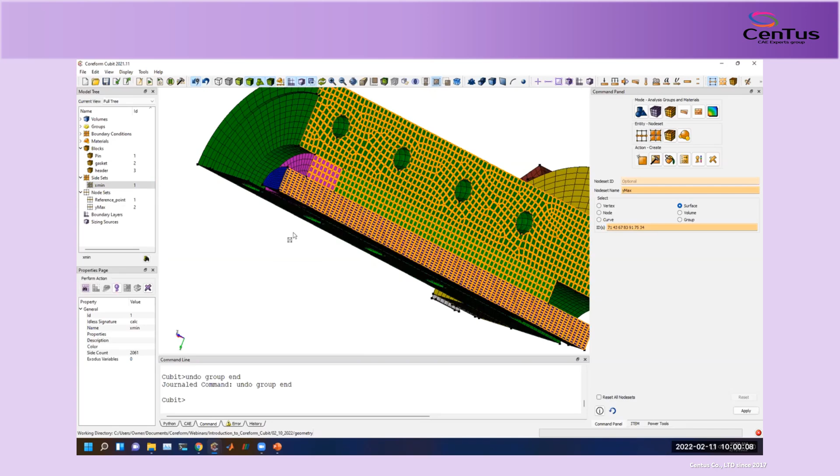What you'll see is that the node set is really just the nodes. And so oftentimes boundary conditions are just applied on nodes. They're just nodal degrees of freedom. And so all that you need to have is what is the node ID inside of a boundary condition. What a side set gives you is for things like pressures that you're applying, you oftentimes need to have the area of the element upon which to integrate a pressure. And so side set, if we zoom in, it contains the topology of those faces. And so it not only contains the nodes, but also the element that they are corresponding to and their orientation, and then you can compute their size and Jacobians on that face. So you can do stuff like integrate a pressure over them.

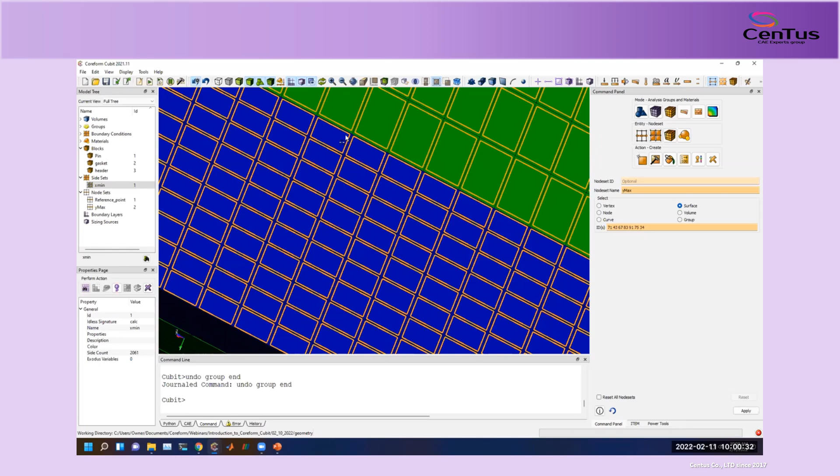Oftentimes, a lot of codes will treat node sets and side sets effectively equivalent when it comes to boundary conditions. So oftentimes, a lot of users will just use side sets for everything, because if they ever want to come back and apply a pressure, they don't have to redefine a node set as a side set. Where I find node sets most useful in my own workflows is, I again use side sets for all my load conditions and boundary conditions.

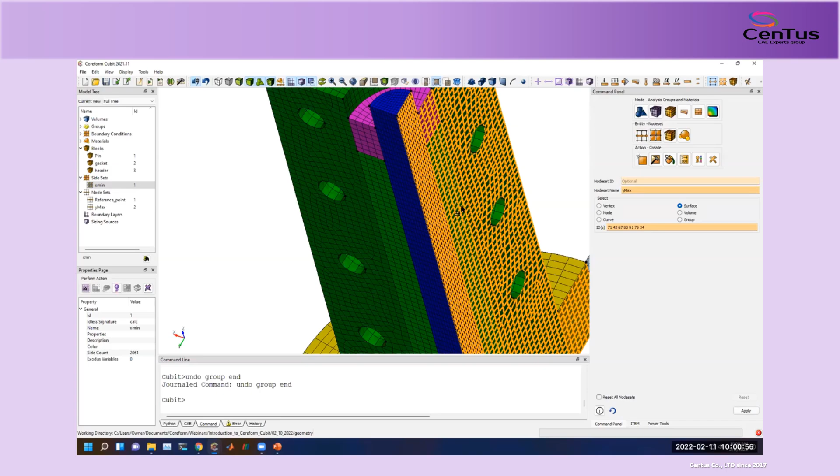I will use node sets for, I want to track the displacement of a single node, maybe throughout my simulation. And I want to maybe track convergence of that node as I refine my mesh. And that's what I personally use node sets for, is that they just become an output set for myself. So in this case, maybe I just want to track the displacement of this node. But it's subtle how they're different. But if you want to apply pressures or integrated conditions, you'll need to have a side set.